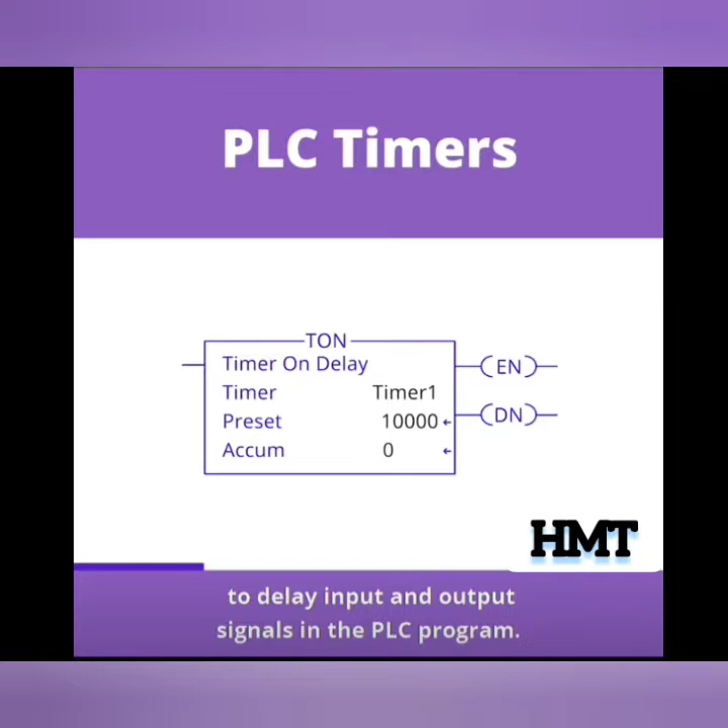Delay inputs and outputs. PLC timers are internal PLC instructions that can be used to delay input and output signals in the PLC program. These timers operate like relay timers, but you cannot hold a PLC timer in your hand, and they do not need to be connected to wires to operate.

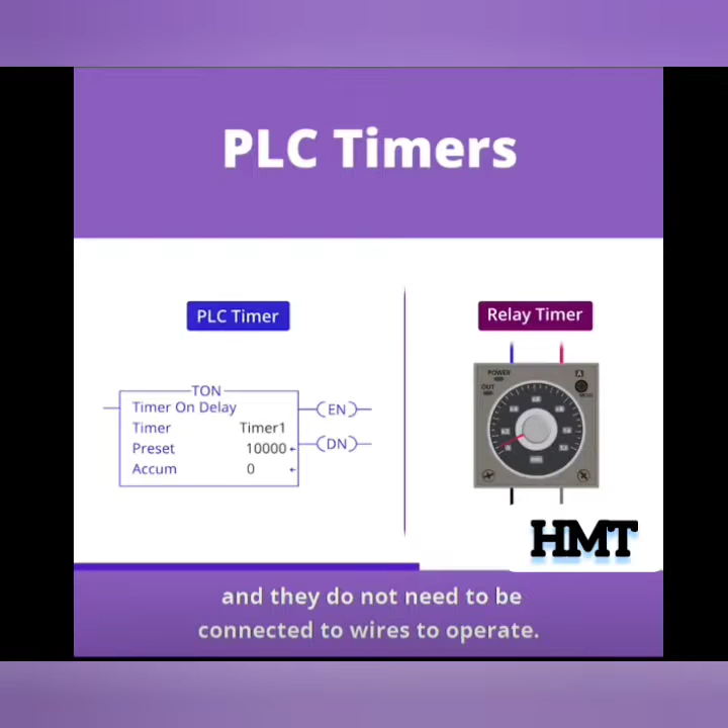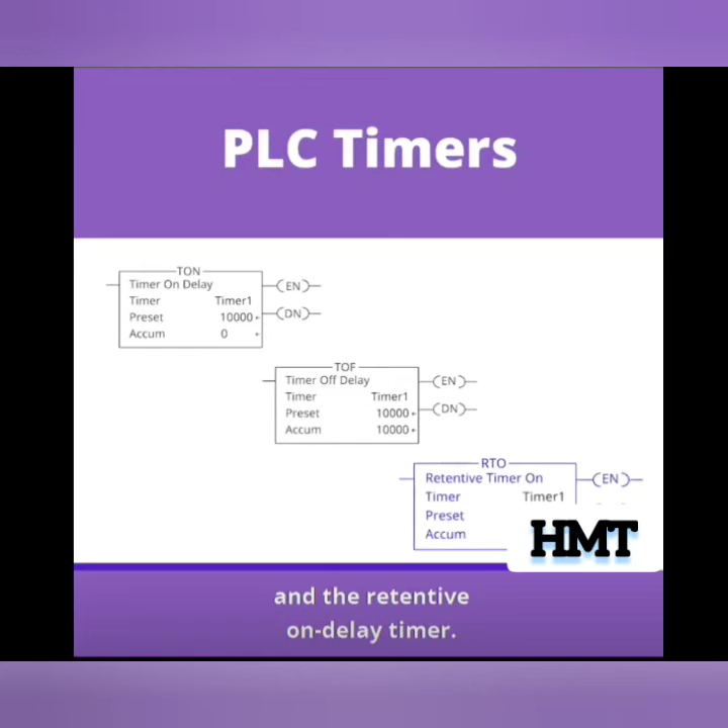There are three main types of PLC timers: the on-delay timer, the off-delay timer, and the retentive on-delay timer. In this video, I will discuss what happens to the PLC on-delay timer when the selector switch gets turned on and off.

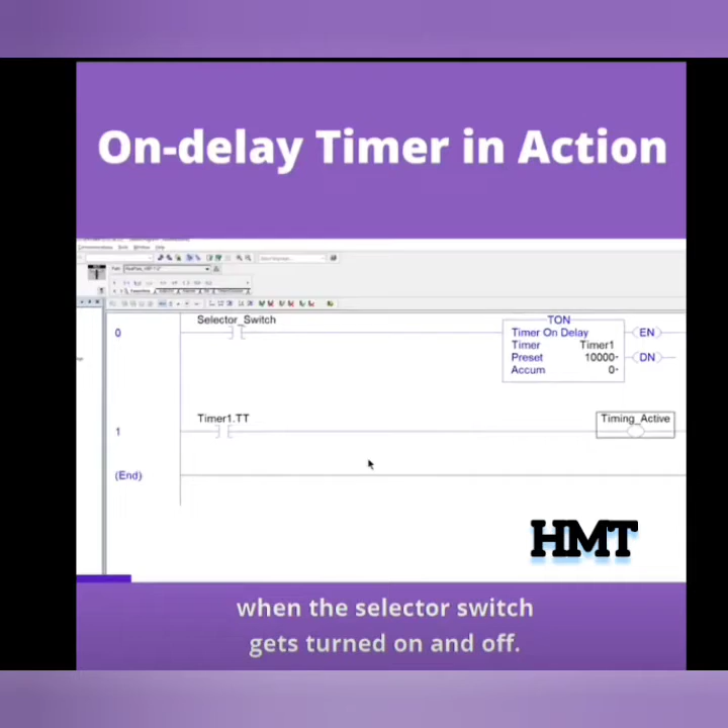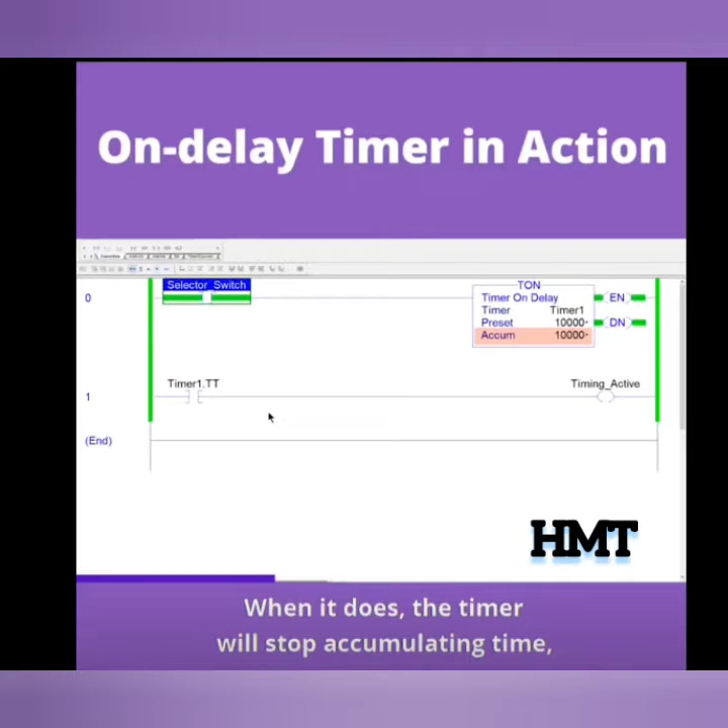When you turn on the selector switch, the timer enabled bit and timer timing bit turn on, and the timer's accumulated value starts accumulating time. If you leave the selector switch on, the timer's accumulated value will reach 10,000. When it does, the timer will stop accumulating time, the timer timing bit will turn off, and the timer done

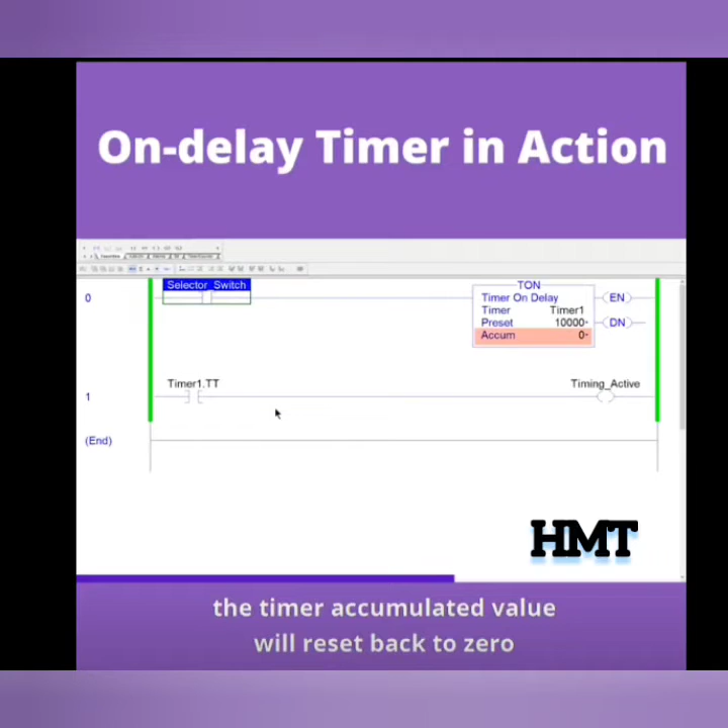bit will turn on. At this point, when you turn off the selector switch, the timer accumulated value will reset back to 0, and the timer enabled and timer done bits will turn off. If you turn off the selector switch before the timer is done timing, the timer accumulated value will reset back to 0, and all of the timer bits will be off.

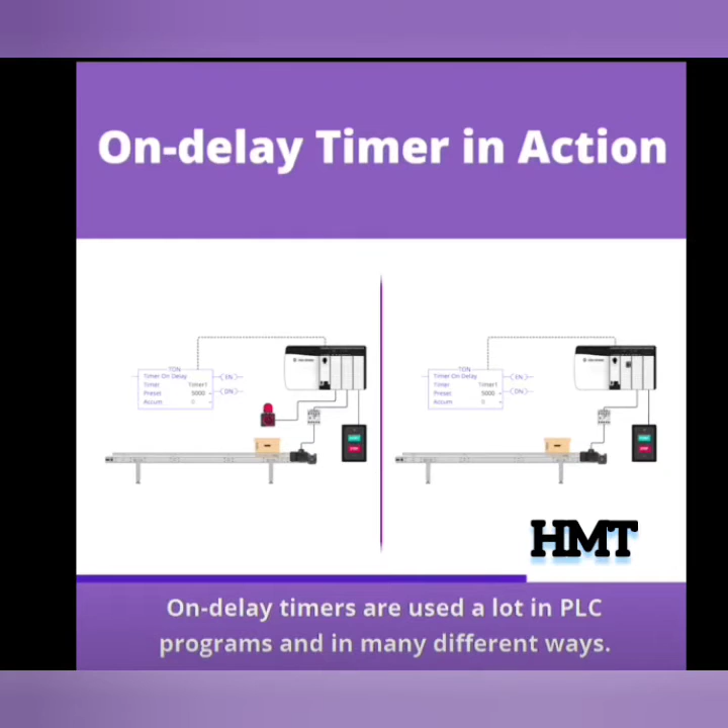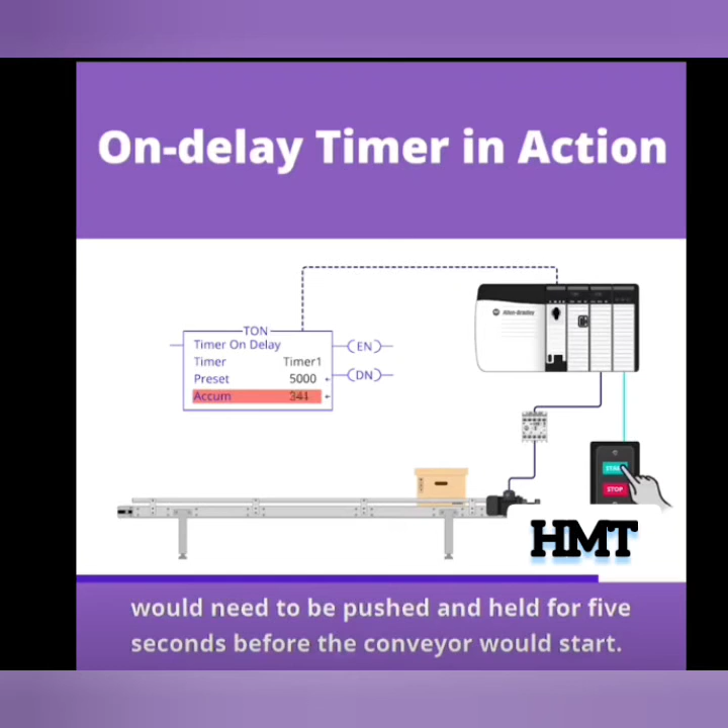On-delay timers are used a lot in PLC programs, and in many different ways. For example, an on-delay timer can be used on a conveyor's start button. The timer could be set up so that the start button would need to be pushed and held for 5 seconds before the conveyor would start. Another on-delay timer could also be set up to sound a conveyor startup warning horn and light.